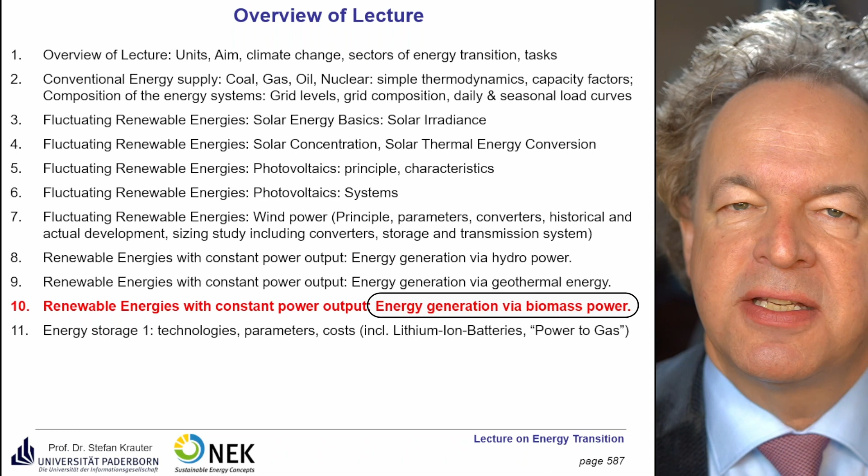Then the following lectures will be about energy storage, meaning how we can make fluctuating renewables like wind and solar more stable. This is quite extensive, so it takes 2 lectures. At the end, I will show you perspective and feasibility of energy transition, comparing opportunities in different countries and regions, especially diesel substitution. We will have a nice example from Princeton University about wind park sizing, optimization, including storage and related transmission systems. We will talk about balancing power via demand-side management, for example, controlled charging of electrical vehicles.

So this is now by Mr. Bain from the year 2004, an introduction to biomass thermochemical conversion. But first, let's take a short look at the video.

Sustainable energy sources are growing in popularity, but we are here to sort the wheat from the chaff, to check out which technologies are going to make the most impact and which are likely to be less useful. I'm Afia Adam. And I'm Ashley House. Hello and welcome to the programme. Today we're taking a look at one of the most basic of energy sources and one which energised the move from caveman to modern man: biomass and bioenergy.

Coming up, we visit the land of the Komodo dragons in Indonesia to see how the nation's biggest palm oil producer is improving sustainability. Waste Not Want Not, a vegetable farm in Kenya that's utilising crop byproducts to produce electricity and fertiliser. Weaning ourselves off coal, we look at the technology allowing power stations to transition to biomass. And finally, we talk to the UK's leading green energy company about plans to produce energy from the stuff under our feet, grass. In the meantime, I travelled to the sunny Italian capital to meet our biomass expert, who's a natural resources officer at the United Nations Food and Agriculture Organization.

According to the International Energy Agency, bioenergy provides 10% of world total primary energy supply, making it the single largest renewable energy source. In 2014, biofuels provided 4% of world road transport fuel and are expected to rise slowly, reaching almost 4.3% in 2020. In 2012, 370 terawatt-hours of bioenergy electricity were produced, equivalent to 1.5% of world electricity generation.

Now, when you think about the palm oil industry, you may recall headlines from the late noughties about how it's environmentally damaging. But the industry is fighting back, responding to the criticism and changing with the time. When you're the world's second biggest palm oil plantation company and you're feeling the pressure to be more sustainable, what do you do? You build a research facility. Or at least that's what Golden Agri Resources has done.

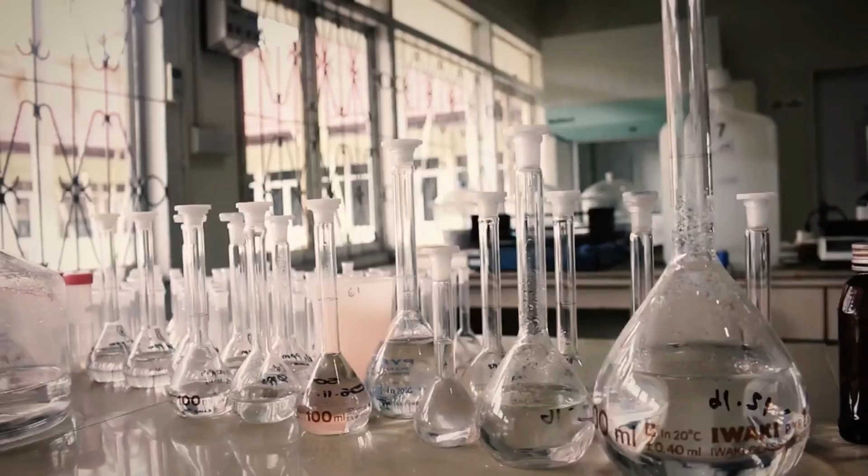The objective of the company is to produce sustainable oil for world demand, whatever the consumer wants to use this oil for, whether it's for food, energy, cosmetics, or any other purpose. But the important thing for us is to produce the oil in a sustainable way, meaning no deforestation, no risk to the environment, and using the best practices.

Palm oil is a vegetable oil derived from the fruit of, unsurprisingly, oil palms. Most commonly, the product is used as a raw material in food production, cosmetics and detergents. But in recent years, it's grown in popularity as a source for first-generation biofuels, such as biodiesel.

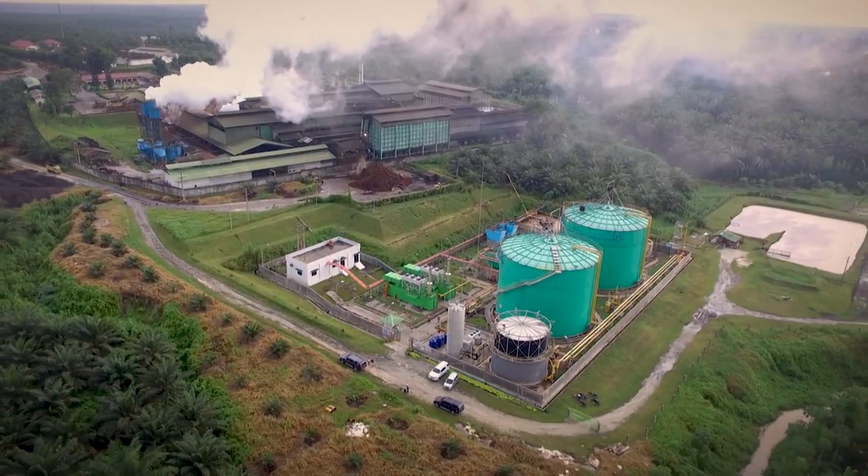That is the waste brought down to biogas by using a bioreactor, which is a completely biological process using mesophilic bacteria to decompose the POME and break down the waste water to generate methane gas. Methane gas being captured, purified and used at our gas engine to generate power.

Biofuels have become an attractive alternative to fossil fuels because they release fewer greenhouse gas emissions. Not only that, when oil palm is planted, it can continue growing for up to 30 years, meaning it has a high carbon capture value.

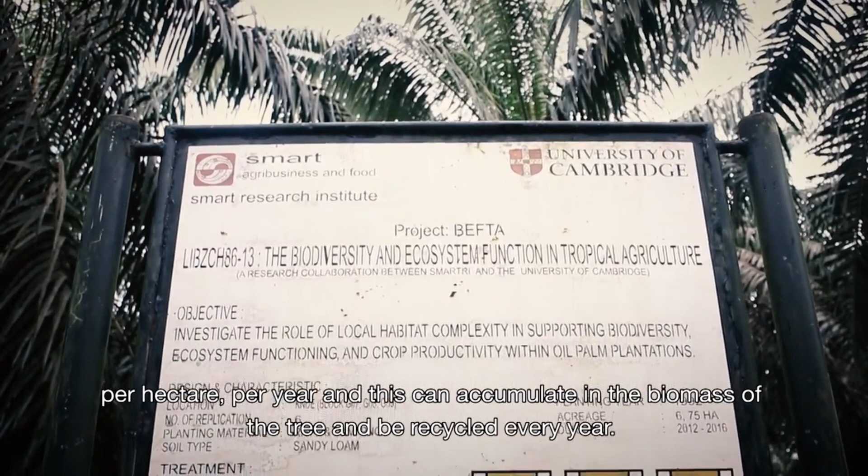What is interesting with palm oil as a plant is that it accumulates carbon in the form of the trunk and in the biomass in the canopy. Every year the palm oil is able to capture about 12 tons of carbon, meaning about 44 tons of carbon dioxide per hectare per year. And this can accumulate in the biomass of the tree and be recycled every year.

When we cut the fronds, we leave them to decompose in the soil, enriching it with organic matter, meaning organic carbon. And when we do the replanting after 25 or 30 years, all this biomass, representing about 100 tons, or about 40 tons of carbon, is also recycled in our soils.

Still, some are critical, saying that with the global population predicted to expand to more than 9 billion by 2050, growing biomass for biofuels is increasingly unrealistic. We need food and we need fuel. There's no getting around that. The solution is in developing them more sustainably.

Andrea Rossi is an expert in sustainable bioenergy and food security. He is the Natural Resources Officer at the Food and Agricultural Organization of the United Nations.

Andrea, thank you so much for having us here on the gorgeous rooftop of the FAO building. Thank you for coming. We can see a lot of green, and that's perfect because today we're talking about biomass.

So Andrea, tell me a little bit about yourself, your work on bioenergy, and what exactly you do here at the FAO. Sure, here at FAO I focus on sustainable bioenergy production and use. In particular, I support developing countries in the design and implementation of sustainable bioenergy policies and strategies that foster both energy security and food security.

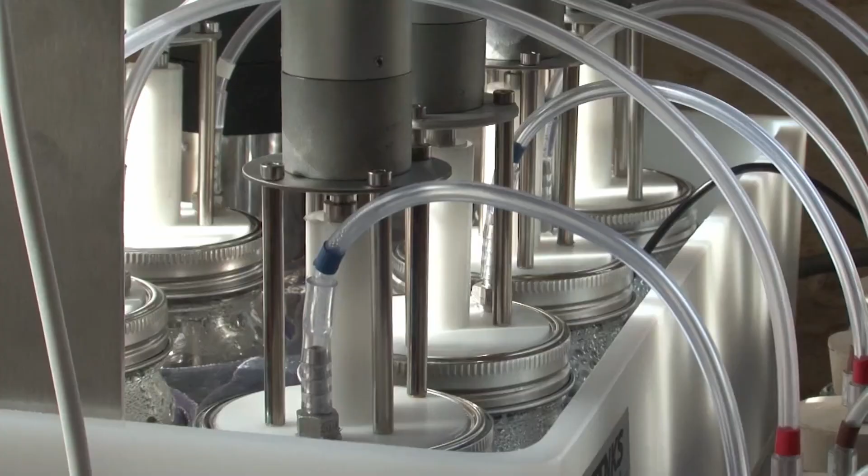It's taken 5 years and many sleepless nights, but finally Oxford-based eco-entrepreneur Mike Mason has achieved his vision, producing biogas from plant waste. Anaerobic digestion is a well-established technology.

Gorge Farm has hundreds of tons a week of waste, and it seemed a shame not to be using it. So I was sitting with some friends over a beer, and they weren't aware of the technology and I wasn't aware of the scale of their waste, and we put two and two together and it became blindingly obvious that it was a good idea.

Mike's farm is close to Lake Naivasha, around 90 kilometres northwest of the Kenyan capital, Nairobi.

On 700 hectares of land, they grow flowers and 20 varieties of vegetables, including baby corn, broccoli and cauliflower, mainly for export to Europe.

As well as feeding people, the crops are now providing the food that fills the belly of this beast, the anaerobic digestion plant. What essentially you are looking at is a big mechanical cow. You feed it biomass on one end, it gives you manure and liquid fertilizer on the other end, and in the process gives you biogas.

Once you've got the biogas, now you've got the fuel required to run the next section of the plant, which is the electricity. Anaerobic digestion is a natural process in which bacteria convert organic materials into biofertilizer and biomethane. It takes around 16 days for the conversion, with biomass working its way through 4 different tanks.

Once we've got the biogas, we need to turn the biogas into electricity. The way we do this is using an engine generator, a gas engine generator. Essentially, this is just like an engine in a car, in a normal vehicle. The only difference is that instead of using petrol or diesel, we use biogas to run it.

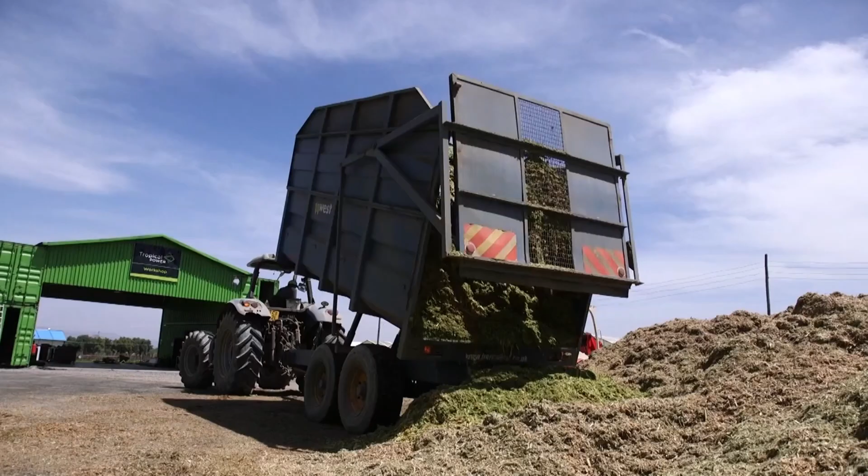At maximum capacity, the biogas plant will require around 120,000 kilograms of biomass residue from the farm every day. This will generate up to 2.2 megawatt hours of electricity. Most of the electricity goes to moving water to where it's required on the farm, and that is pumping.

As for heat, what we've got is greenhouses, and greenhouses need some optimum temperature at which you get optimum production from plants. Sometimes to achieve this, the farm will use diesel boilers to heat the greenhouses. We intend to displace these diesel boilers and basically pipe the heated water to the greenhouses.

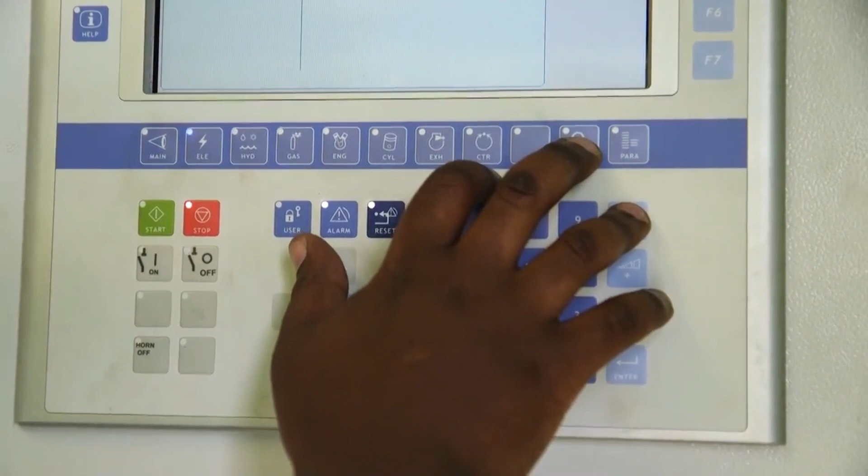Crucially, any excess electricity that isn't required by the farm is fed into the national grid. These sorts of facilities can be replicated, supporting the environment and local economies along the way.

Recent research shows that we could speed up the process of digestion by up to perhaps 30 times. Do that and we change the whole relationship between agricultural waste and energy, and every farmer becomes an energy supplier as well as a food grower.

What are the opportunities for developing countries to develop the use of anaerobic digestion even further so more people can be connected to sustainable energy resources? And of course, what are the limitations with that?

Anaerobic digestion is a mature technology with strong potential, and significant amounts of biogas can be produced through the anaerobic digestion of agro-industrial and livestock residues. This biogas can then be used to generate heat and electricity, part of the heat can be used for the industrial process, and the surplus heat can be supplied to local communities through district heating systems.

This type of technology has a lot of potential, but of course there are also challenges and barriers that need to be overcome. This is again where the importance of a long-term, stable, enabling environment comes into the picture. Some of these limitations include artificially low energy prices due to fossil fuel subsidies, the high upfront investment required for the installation of the technology and its purchase, combined with high cost of capital, and in some cases problems accessing credit faced by investors in developing countries.

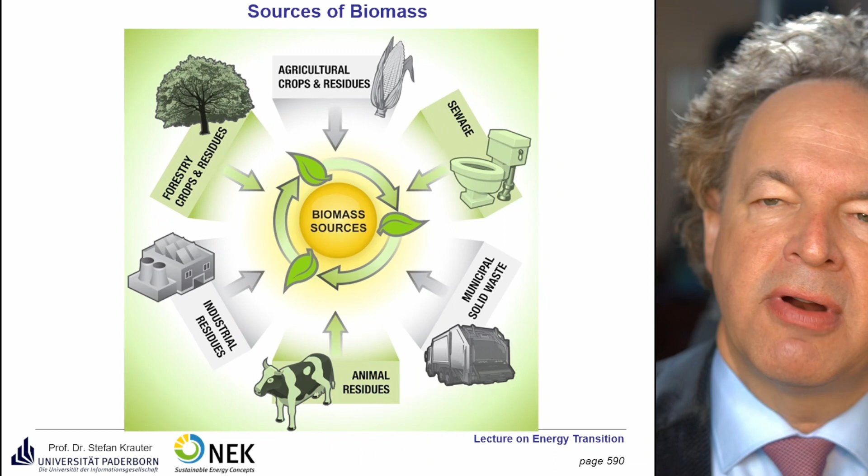Here we see the different sources of biomass. Top left side, the forestry and crop residues, agriculture crops and residues, sewage, municipal waste, animal residues and industrial residues. These are all biomass sources.

For the conversion process in the middle, we have gasification, combustion and co-firing, pyrolysis, and different types of fermentation. As end products on the right side, we have different fuels, for example ethanol or renewable diesel, electricity, heat, but also a lot of chemicals, starting with plastics, solvents, pharmaceuticals, and so on.

Here we have an overview of the biomass products and the conversion processes and the tools for them. First we have hydrolysis, using acids and enzymes. As a product we have sugars and lignin. We have gasification by high heat and low oxygen, called syngas. We have digestion from bacteria, producing biogas. We have pyrolysis.

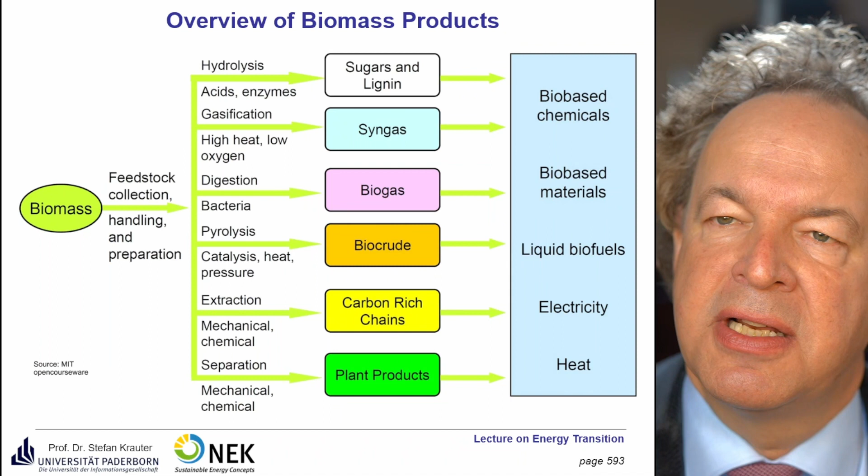Pyrolysis is by heat, pressure, and catalysis, giving us biocrudes. We have extraction, for example mechanical or chemical extraction, giving carbon-rich chains - a lot of possible products. We have separation, mechanical or chemical, giving plant products. These are possible end products: bio-based chemicals, bio-based materials, liquid biofuels, electricity, and heat.

Hey, welcome to our final energy source presentation, and today we're looking at biomass energy. We had mentioned in class before that biomass energy was energy from recently living things, so we're going to take a look at what exactly that includes. You would consider things like wood, but also trash, landfill gas, crops, and alcohol fuels.

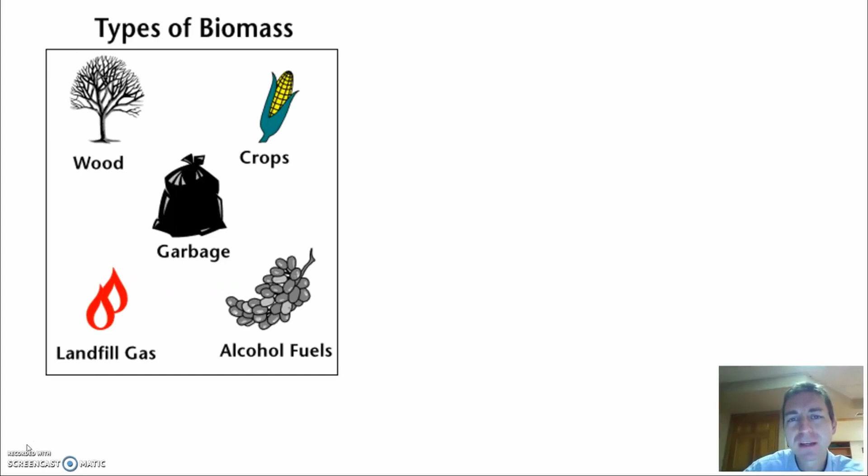All of these things have in common the same sequence of energy transformations, and that is the energy starting at the sun. When the sun comes in as electromagnetic radiation, that energy gets absorbed by plants and is used in photosynthesis to convert radiation energy into chemical energy. So we form sugars, and those sugars are transformed as they go through different processes, and it's still chemical energy at that point.

Ultimately, how do you get that chemical energy to become useful energy? Well, we burn it - you're burning your biomass fuel, and that produces heat or random kinetic energy, which could then be used to run a power plant. When you're burning biomass, it is hydrocarbons that you're burning, and these hydrocarbons release carbon dioxide and water vapor. At this point, you're saying, that sounds an awful lot like fossil fuels.

When we look at the similarities, yes, there is a lot of similarity in terms of where the matter is coming from. It's carbon dioxide that's been pulled out of the atmosphere and fixed into these sugar molecules so that we're getting chemical energy. We have a lot of similarities in terms of the exhaust products you're getting out of them as well. But a major difference is: when was that carbon dioxide in the atmosphere?

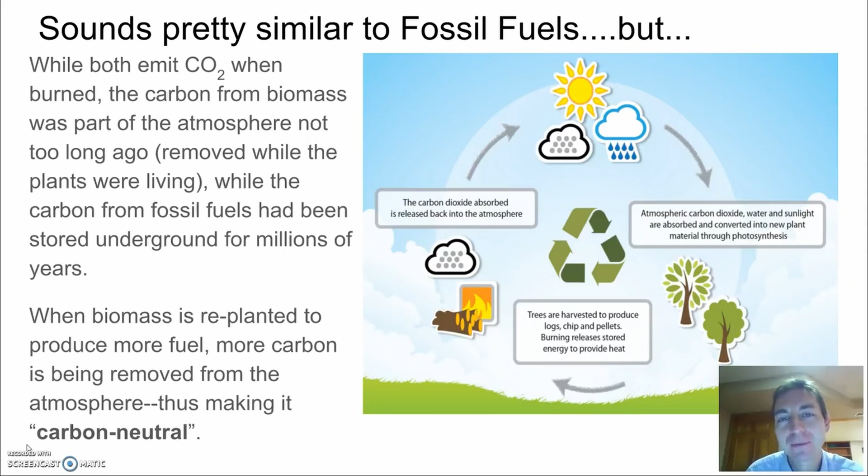So it's a complete cycle, and therefore it's often argued to be carbon neutral. It doesn't add additional carbon dioxide to the atmosphere because even though CO2 is coming off of the burning reaction, it is not actually new, because it's been recently in the atmosphere to begin with. It came from plants that had just recently taken it out of the atmosphere.

Other forms of biomass energy besides burning wood would be things like landfill gas, which we've already talked about, and burning trash, which also falls in this category of biomass fuels. But something we haven't really talked about is a way you may not even be conscious that we use biomass energy all the time. Your car is probably running off of biomass energy a little bit at least. What do I mean?

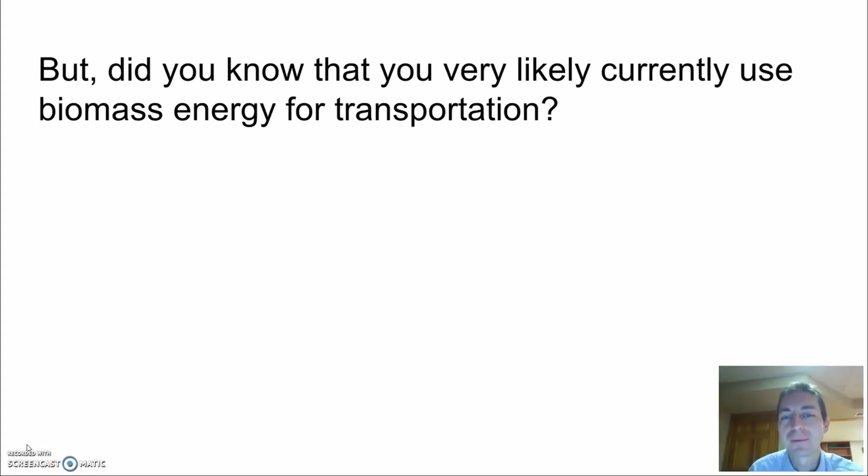I'm talking about this: you go to the gas pump and read the little sticker, and it says this product may contain up to 10% ethanol by volume. Typical unleaded gas here in Connecticut, you're going to find about 10% ethanol, and ethanol is biomass fuel.

So why are we putting it there? Well, there's a couple of things. Number one, it's been shown to reduce certain pollutants that are given off when you are combusting the fuel inside the engine. The byproducts come out a little bit cleaner when you have ethanol blended in, and that's one of the reasons we use it.

Another argument for ethanol use is that it extends the lifespan of how long our fossil fuels will last. Gasoline will last that much longer if we're only using 90% of it instead of 100% of it in our gas tanks. So when we look at how you make ethanol, what's the process, where is it coming from?

We have a typical pattern for how that happens today, and that is corn. There's a lot of corn grown in the United States, and it's not all for food—some of that corn is for making fuel. If you look at crops like corn, you harvest it, and you're actually using the edible part of the corn to make fuel for a car, for example. You'd grind it up, separate it into the different kinds of sugars you have, and distill them.

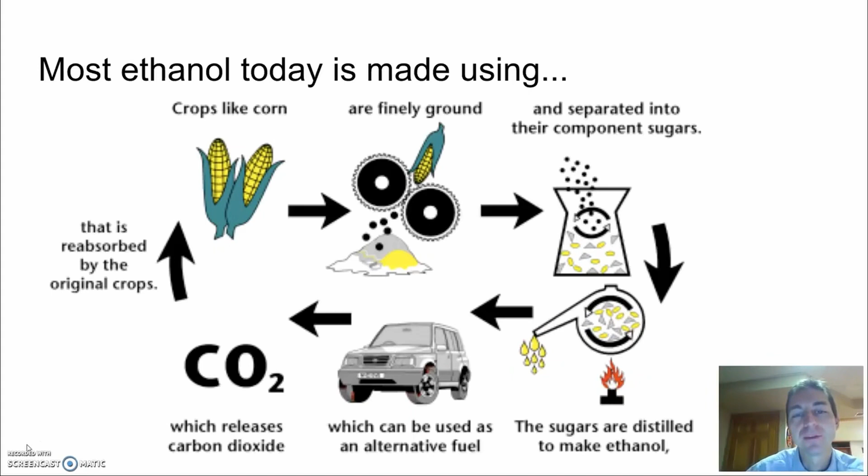Just like making alcohol, you're doing a distillation process, and that's basically what you're producing. This gets blended into gasoline and burns—it's extra fuel in a sense. So it's going to be producing some carbon dioxide, but you'd argue it's neutral because it's getting reabsorbed by the next round of crops you're growing, which are taking that carbon dioxide in.

So some people have thought, wouldn't it be better if we could use the parts of the plant that aren't so useful? One idea is to take the plant matter that's not digestible, but use it in a way where we could still do the same kind of process. This is referred to as cellulosic ethanol. One idea for a crop that we can grow really quickly and that is full of usable material for this process is known as switchgrass.

We could plant this grass that grows rapidly, harvest it, and then do some extra steps. Some initial pre-treatment is necessary, involving shredding it up and adding chemicals to break things down so you can get the regular fermentation reactions to take place. Then you can produce fuel from the waste products, or what are typically considered waste products from a plant.

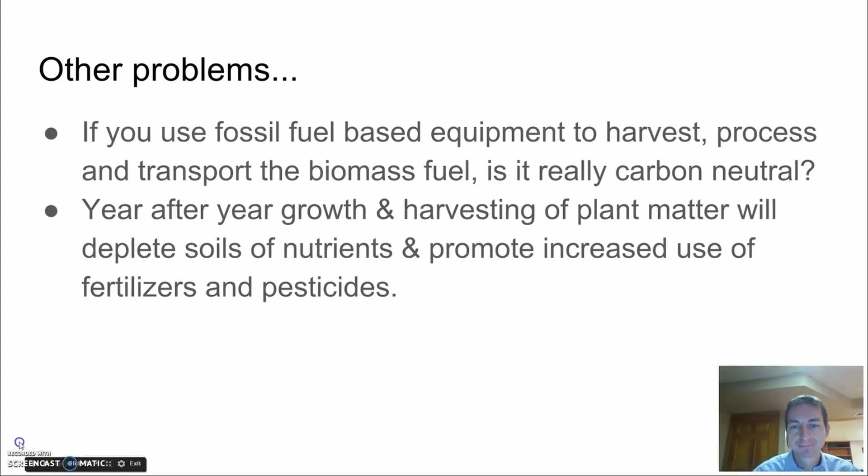Let's see some basic definitions. What is combustion? Combustion is the thermal conversion of organic matter with an oxidant, normally oxygen, to produce primarily carbon dioxide and water. The oxidant is in a stoichiometric excess to allow complete oxidation.

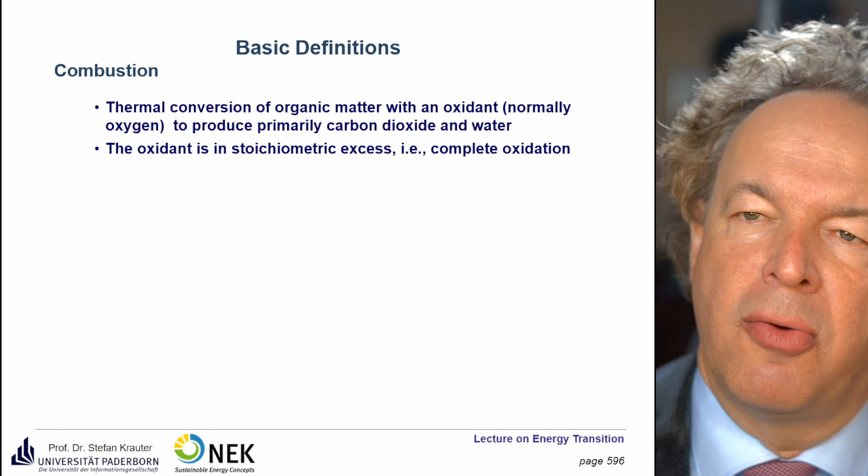And we have pyrolysis. Pyrolysis is the thermal conversion or destruction of organics in the absence of oxygen. In the biomass community, this commonly refers to low temperature thermal processes producing liquids as a primary product, with the possibility of chemical and food byproducts.

Gasification is the thermal conversion of organic matter at elevated temperature and reducing conditions to produce primarily permanent gases, with char, water, and condensables as minor products. The primary categories are partial oxidation and indirect heating.

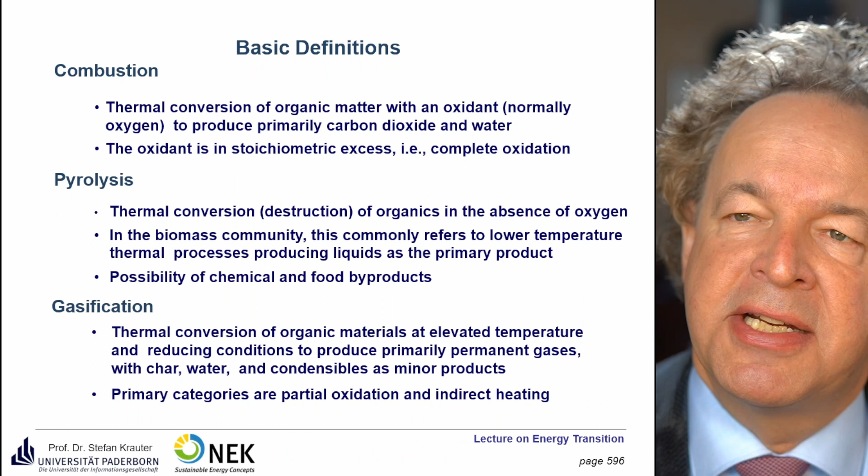This is in the vicinity of 16 to 17 megaBTU. This is a British thermal unit. So 1 kilojoule is about 1.055 BTU, one British thermal unit.

Then we also have the unit SCF, meaning standard cubic foot. The conversion is for 1 cubic meter, it's about 35.3 cubic feet. The MAF here means moisture and ash free, because otherwise you would lose some energy converting that moisture into steam.

Then we have syngas. Major components are carbon monoxide, hydrogen, and carbon dioxide. The carbon monoxide to hydrogen ratio is in the typical range of 0.5 to 2. The high heating value is 450 to 500 BTU per standard cubic foot.

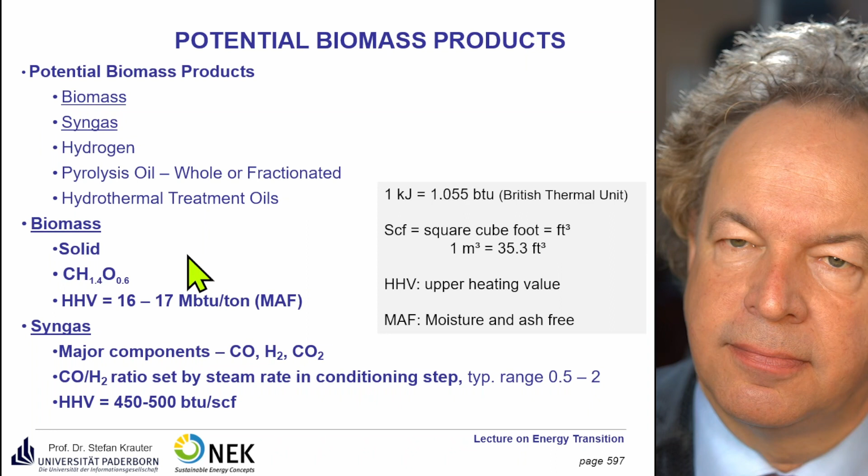We have pyrolysis oil, mentioned before already. Its chemical composition: water 20 to 30%, lignin fragments 15 to 30%, aldehydes 10 to 20%, carboxylic acids 10 to 15%, carbohydrates 5 to 10%, phenols 2 to 5%, furfurals 2 to 5%, ketones 1 to 5%.

Then we have hydrothermal treatment oils, so it's water plus alkali at a temperature of 300 to 350 degrees Celsius. The pressure is high enough to keep the water liquid, and the use of carbon monoxide is also an option here. Yield is above 95%.

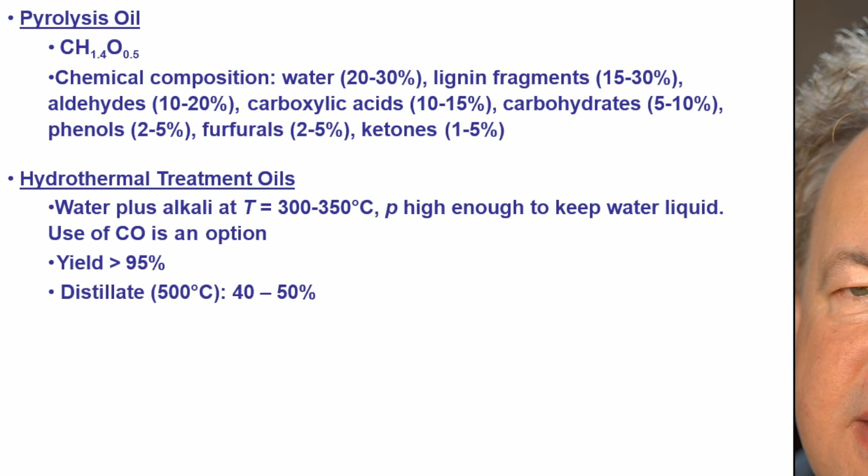Qualitatively, we have long aliphatic chains, some cyclic components containing carbonyl groups, a few hydroxyl groups, ether linkages, and carboxylic acid groups. The heating value is between 28 and 34 megaBTU per ton.

Let's start with combustion. The stages of combustion of solids: first we have drying, to take out the moisture. Then we have devolatilization via pyrolysis or via gasification. Then we have flaming combustion. Then we have residual char combustion at the very end.

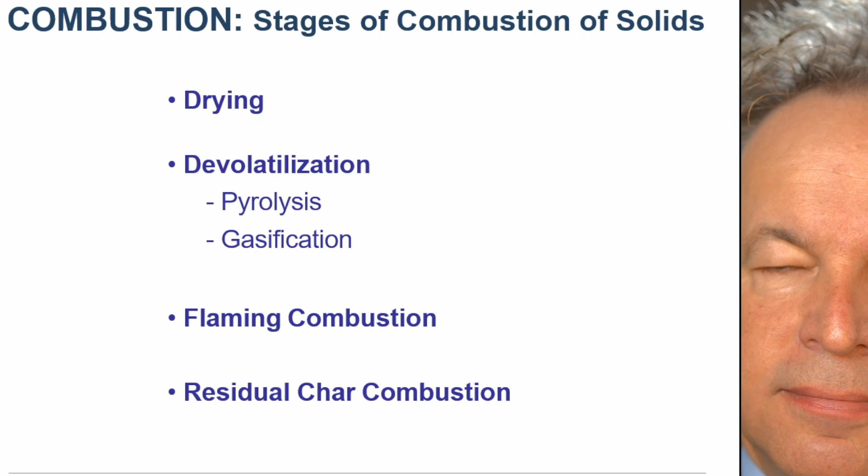The typical combustion reactions are: we have a carbon atom, solid form, which oxidizes via an oxygen molecule, gas form, to form carbon dioxide, which is also a gas.

Or we can form hydrogen in gaseous form with oxygen also in gaseous form to make water. We use double the amount of hydrogen than oxygen to get H2O liquid. Then we have CH4, that's methane, also gaseous, plus two oxygen molecules, giving as products carbon dioxide, gas, and water, liquid.

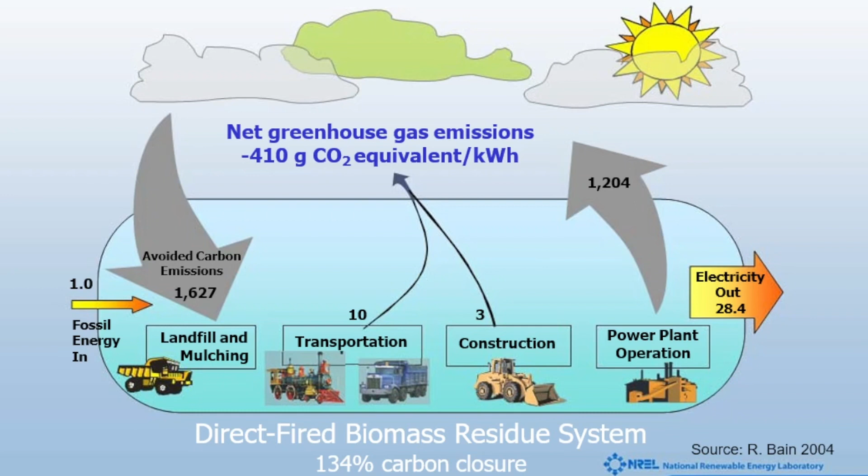That's changing now, this data is from 2004, but biomass electricity production didn't make as much progress as wind and solar power.

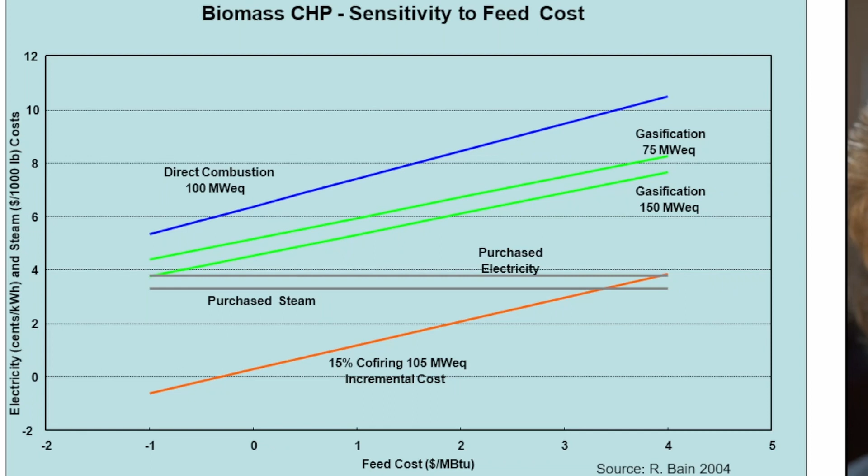Here you have the sensitivity to feed costs. On the x-axis are the feed costs, and on the y-axis the electricity costs. It's apparently linear: if you double the feed costs, or have high feed costs, then you also have high electricity costs.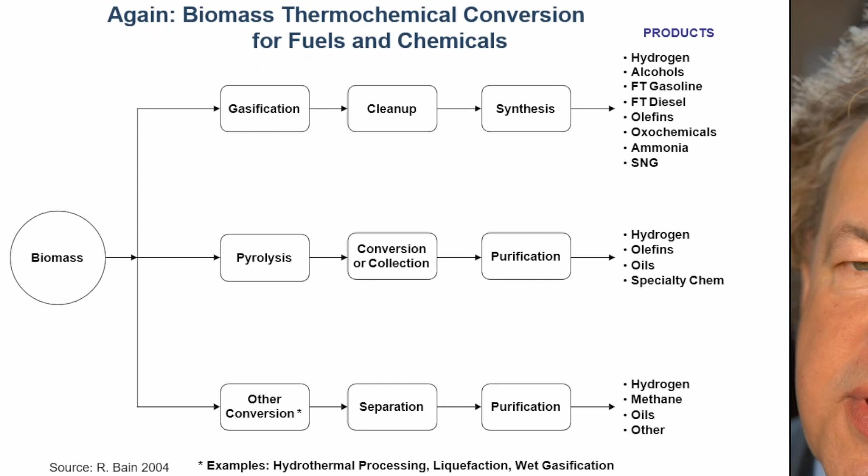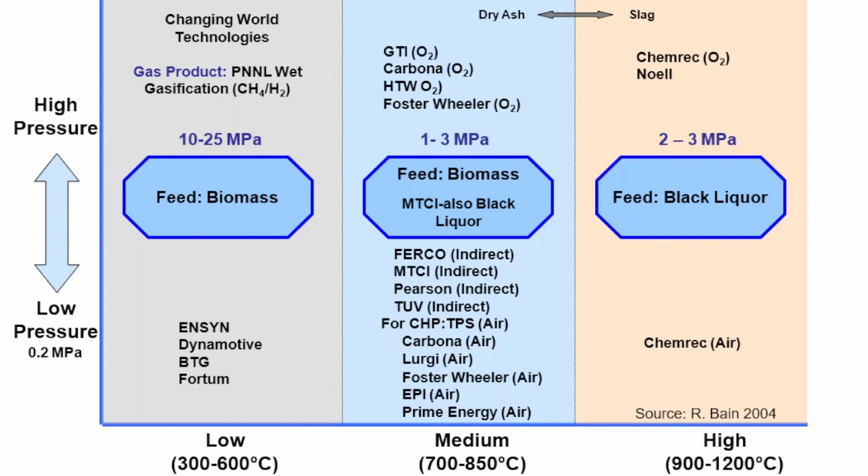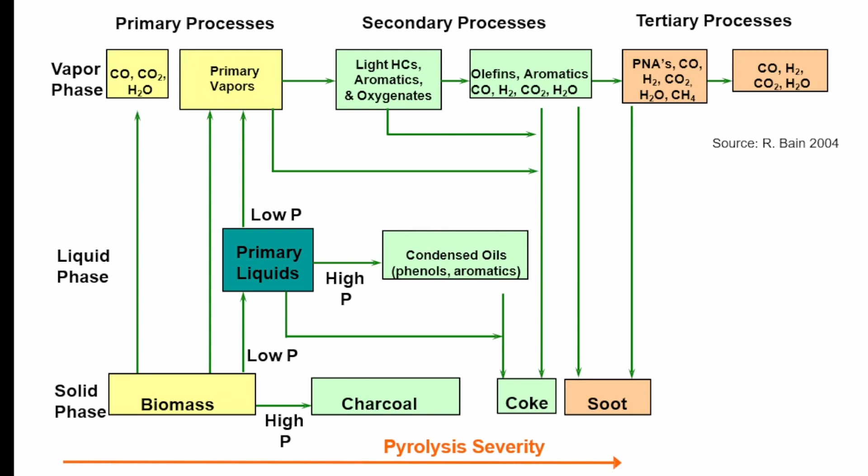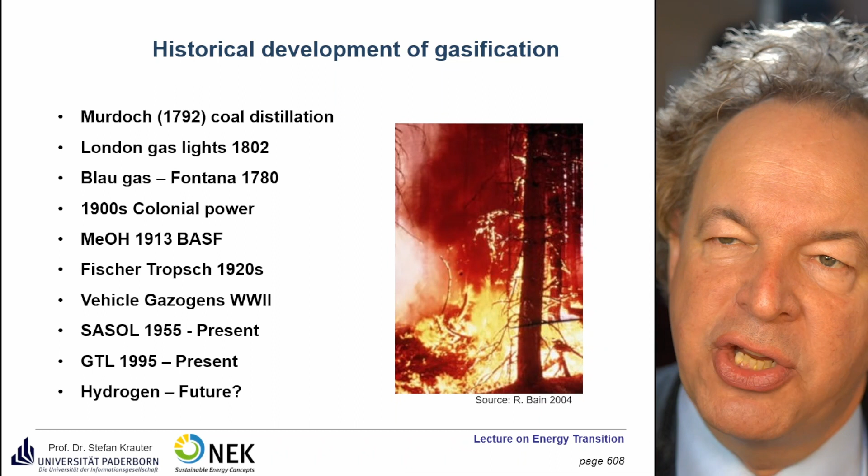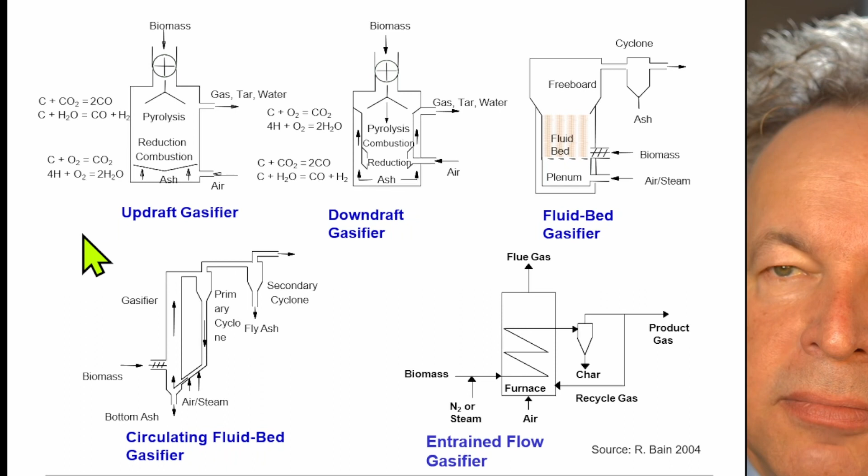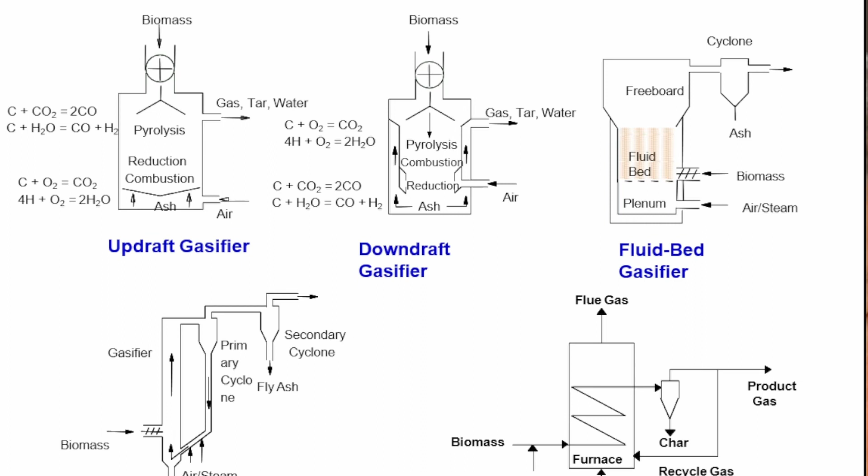Next, we have the downdraft gasifier. Again, the biomass comes from the top, the air comes from the lower part, and then the gas comes out from a lower part and goes up. The advantages are it allows small scale applications, low tar. The disadvantages are feed size limits, scale limitations, producer gas, and it's moisture sensitive.

We have the fluid bed gasifier. So we have a fluid bed. The biomass comes from the lower part and also the air from the lower part. And we have a cyclone to remove the ash. The most important part is the fluid bed here. This has the advantage that we can use a large-scale application. We have good feed characteristics, direct and indirect heating. It can produce syngas. The tar removal is only medium, and we have a high particle loading.

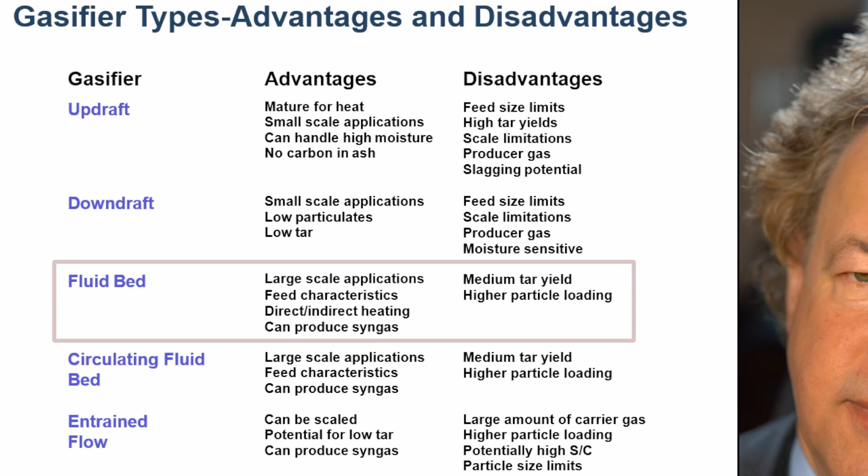Then we have the circulating fluid bed. It's here, so the bed is circulating. This has the advantage that we also have large-scale application. They have good feed characteristics and can produce also a syngas. Same disadvantages: medium tar yield, and we have a high particle loading.

And we have the entrained flow. So we have here the biomass, air and furnace, and then we have the char removal. We recycle some gas for the furnace. It can be scaled. Advantages also, you have low tar. The disadvantage is a large amount of carrier gas is needed, and high particle loading.

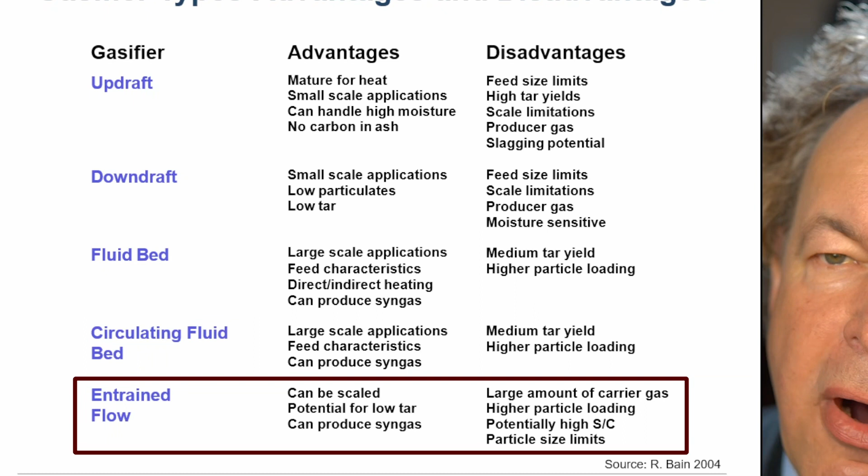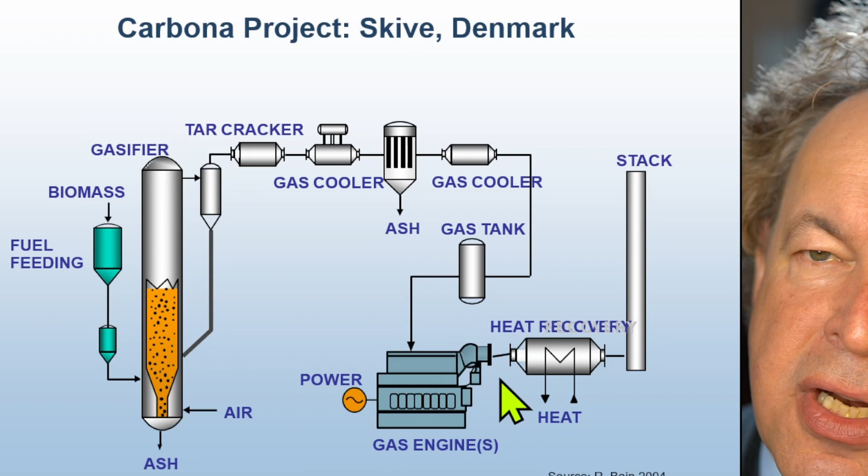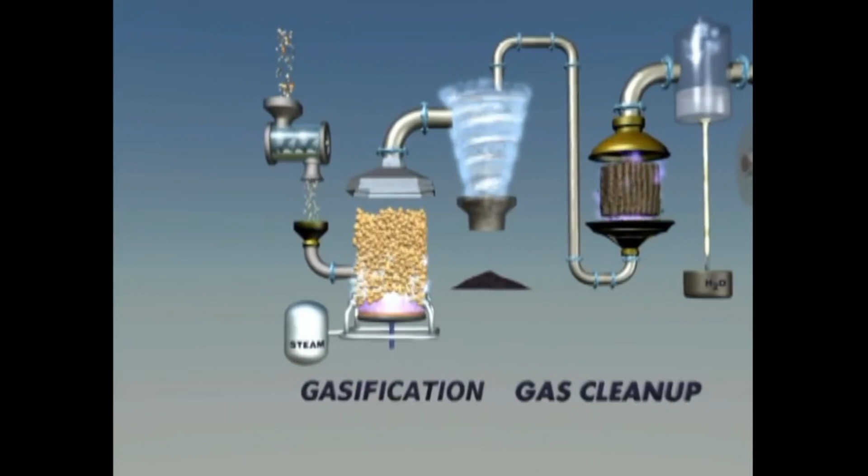The thermochemical conversion process uses heat to break down biomass into intermediates, such as gas or bio-oil, that can be upgraded into fuel and other products. One type of thermochemical conversion process is gasification, a method that uses heat to turn biomass into a hydrogen and carbon monoxide-rich gas called synthesis gas, or syngas. This in turn is converted into liquid transportation fuels or other products. Gasification occurs at relatively high temperatures.

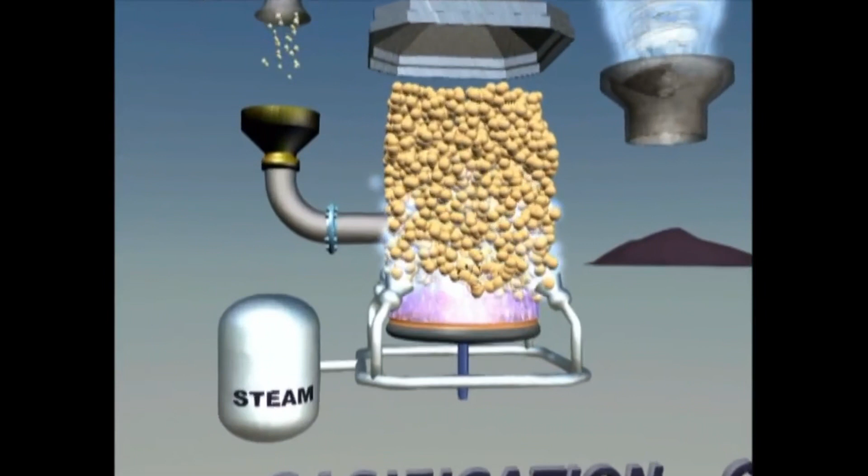Here's one example of a gasification conversion process. Wood material such as forest residue is a common feedstock for the gasification process. For best results, feedstock wood chips are no more than 2 inches in size and have 20% to 30% moisture content by weight, depending on the gasifier. In the gasifier, the biomass is broken down into vapors in a carefully controlled environment that typically contains oxygen and/or steam. The syngas produced is made up of carbon monoxide and hydrogen.

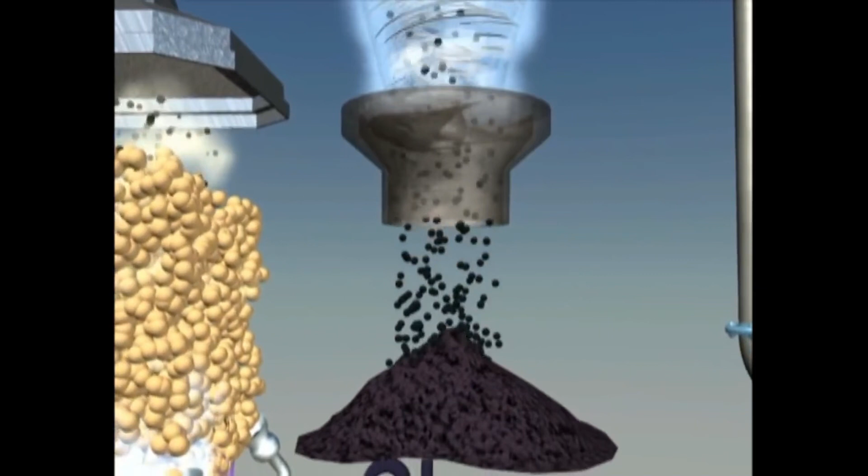Char, a solid byproduct of gasification, is typically removed using a cyclone. Cyclonic separation allows removal of particulates from a gas stream without a filter by using rotational effects in combination with gravity to collect the particles. Tars and methane are also produced. Their quantity and composition depend on the gasification environment. Tars are high molecular weight organic compounds. If they are not removed, these tars will contaminate downstream equipment and inhibit fuel synthesis.

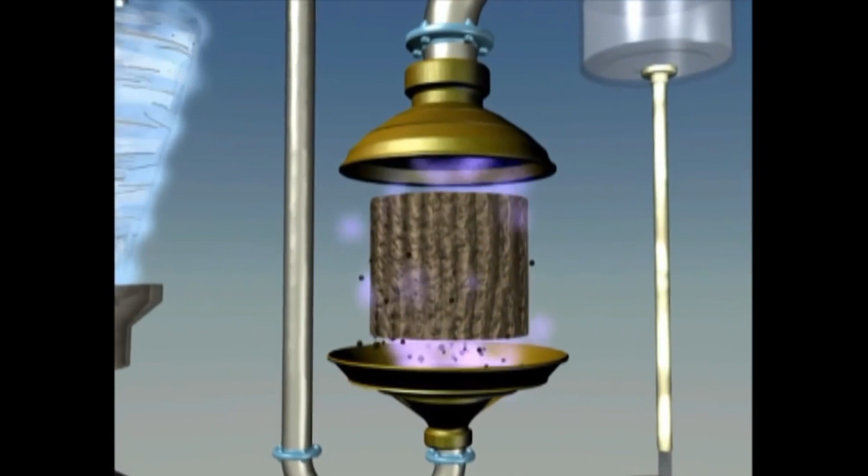One way to remove methane and tars is by using special catalysts to convert the compounds into additional syngas, thus eliminating the methane and tar problem while also improving the efficiency of the process. Additional cleaning and conditioning steps may be required to remove other contaminants such as ammonia, sulfur, and carbon dioxide.

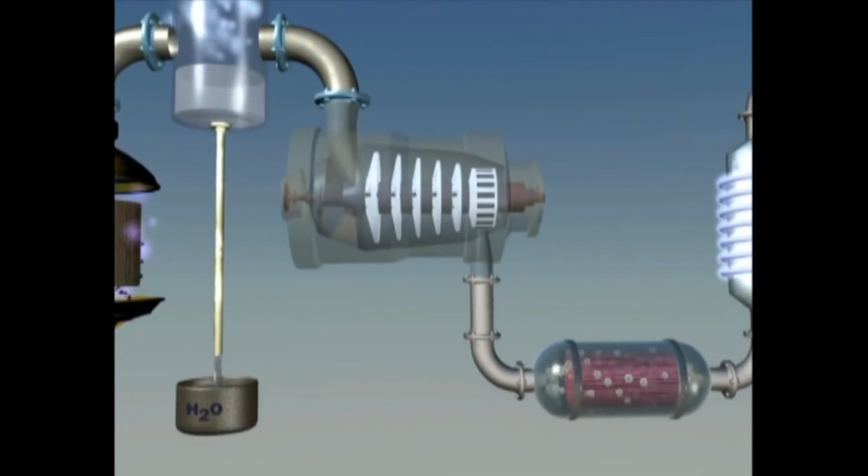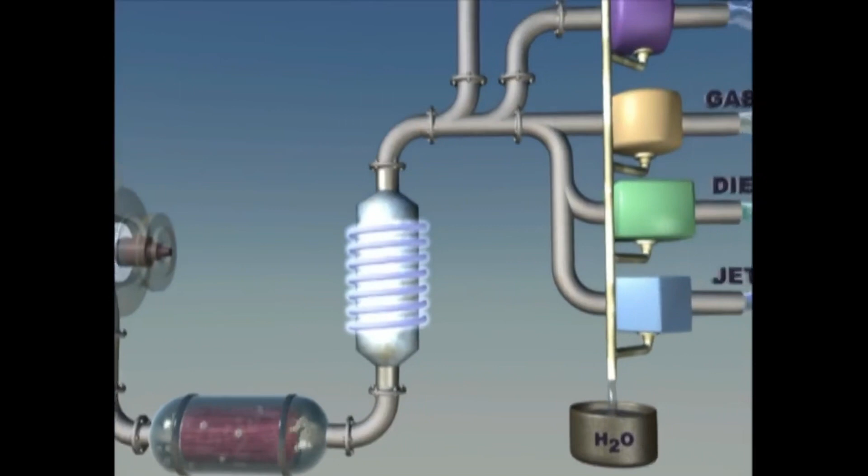The syngas is then conditioned to produce the desired ratio of carbon monoxide and hydrogen to achieve optimal chemical reactions in subsequent steps. The pressurized hot syngas is then passed over a catalyst to form a liquid. The catalyst is contained in a reactor, and the syngas is passed through the reactor, where the carbon monoxide and hydrogen molecules combine to form larger molecules. These molecules are subsequently cooled, condensed, and refined into clean, renewable transportation fuels and other products.

The Department of Energy has supported development of innovative technologies that result in higher yields and superior quality of biomass syngas. These efforts have also resulted in a much more thorough understanding of the gasification process. Enabled by these advancements, industry is deploying gasification technologies that will bring clean, renewable transportation fuels and other biomass-based products to the marketplace.

Here you see the contribution to hydrogen price. So we have a low pressure indirectly heated gasifier system. It's designed for 2,000 tons a day, and we have costs of $30 per ton of dry feedstock. This is the main cost driver, 41%. They have some costs for feed handling and drying. We have costs for gasification. We have costs for the compressor. We have costs for reforming, heat exchange, and so on. And the steam has a negative price because we can sell that steam.

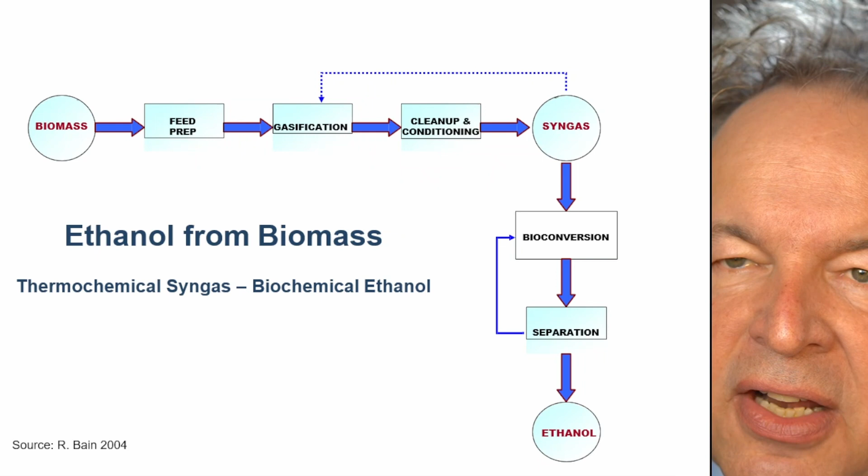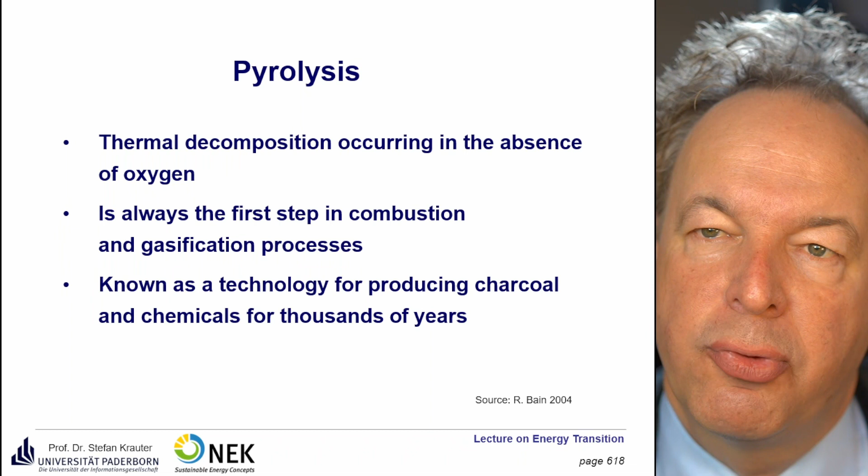We come to pyrolysis. So what is pyrolysis? Pyrolysis is a thermal decomposition occurring in the absence of oxygen. It's always the first step in combustion and gasification processes. It's known as a technology for producing charcoal and chemicals for thousands of years. Let's see a short movie about this.

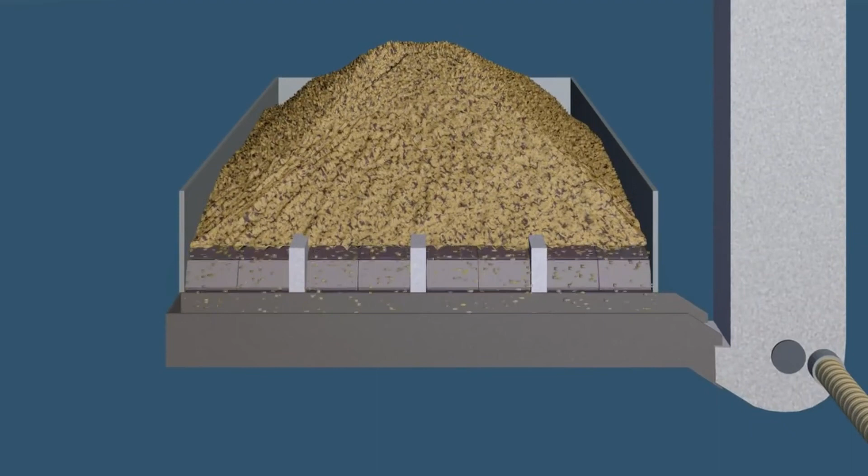A visualization of the biomass pyrolysis process. Biomass storage and drying: wooden or agricultural biomass stored in a dedicated storage facility is transported to the pyrolysis reactor via a screw feeder. The raw biomass is pre-dried inside the feeder through the use of hot and dry air flowing in the crossflow. Biomass pre-drying has a positive impact on the reduction of the moisture content inside the process material by a few percent, and additionally increases the pace of the processes occurring in the following stages.

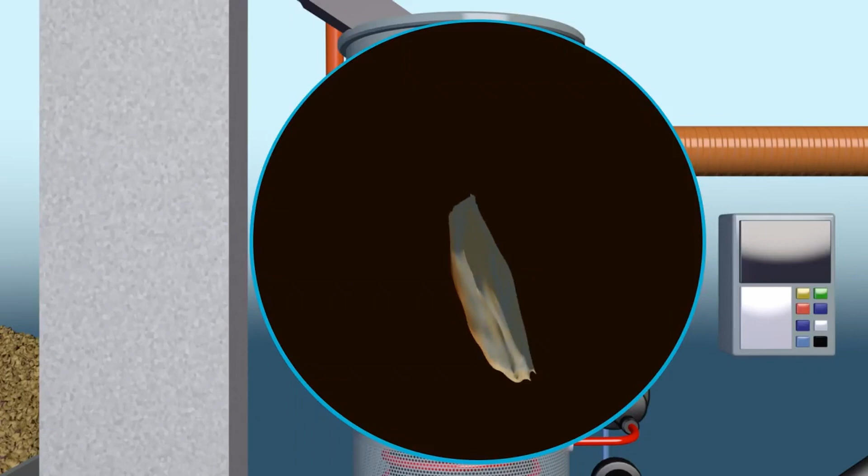Biochar production: pre-dried and preheated biomass then goes to the pyrolysis reactor, where four processes take place. The moisture evaporation process: all the moisture accumulated in the raw biomass has to evaporate in order to initiate the carbonization process. Depending on the type of biomass and the amount of moisture accumulated in the process material, it can take from several to more than a dozen seconds, and its efficiency is due to the high temperature in the upper part of the reactor.

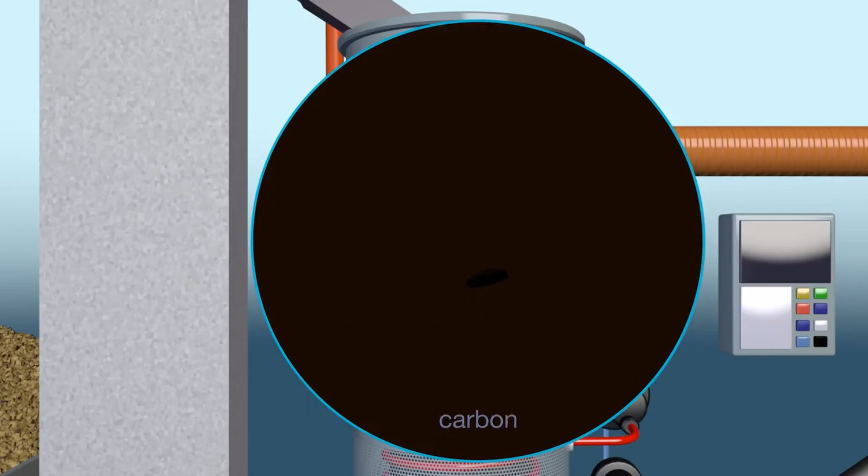The carbonization process: dried and degasified biomass is treated with high temperature. This process results in the quick concentration of elemental carbon and the disappearance of the fibrous structure, improving its grindability. Depending on temperatures inside the reactor and the duration of the carbonization process, the ready material can have a calorific value in the range of 21 to 29 megajoules per kilogram.

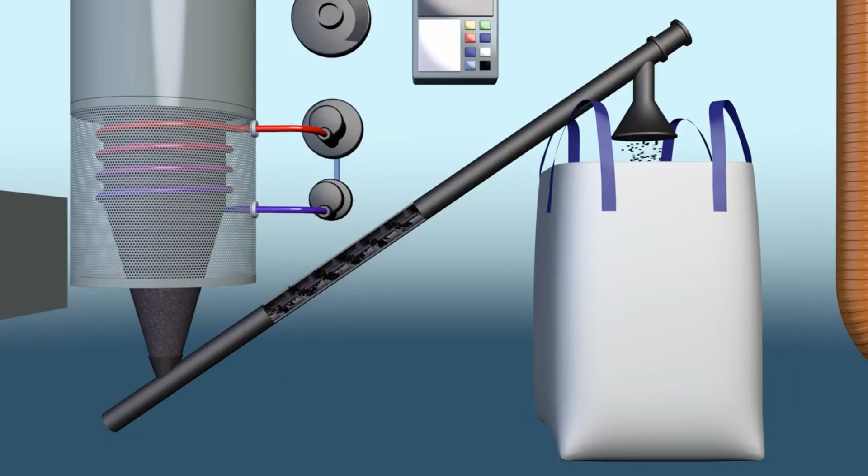The cooling process: the ready material is cooled to ambient temperature with the use of a cross-flow water cooler. In the next stage, carbonized biomass is loaded to big bags, pelletized, or transferred directly to the boiler.

Heat generation: the flammable gas has a relatively low calorific value, so the best way to make use of it is by conversion to hot water. Pyrolysis systems with productivity from 300 to 1,000 kilograms per hour can supply district heating networks with a maximum capacity from 1 to 3 megawatts respectively.

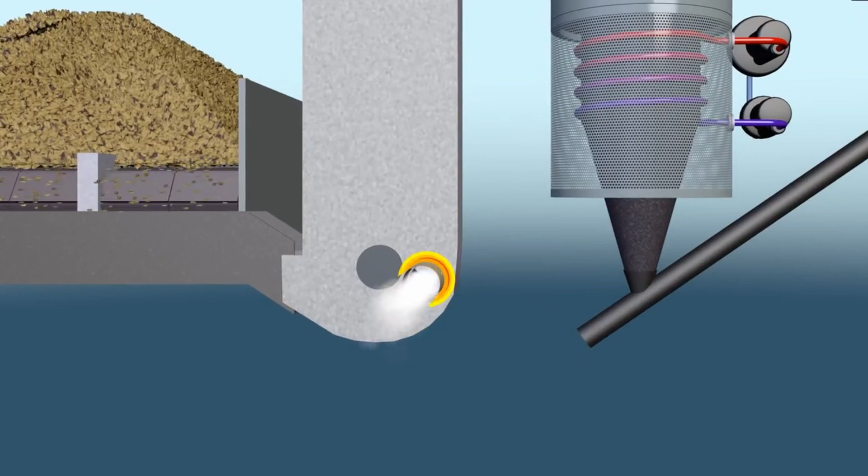The yield of flammable gases depends on the type and quality of the processed biomass and the expected characteristics of the carbonized biomass. In order to maximize the efficiency of the pyrolysis process, hot air taken from the coat of the reactor is used in the biomass pre-drying process. Hot air is transferred to the bucket feeder, which was illustrated some time ago. At the end of the process, all gases are mixed and emitted through the common stack.

From the products of biomass pyrolysis, if we use fast pyrolysis, we have 75% liquid products at moderate temperature and short residence time, 12% char products, and 13% gaseous products. If we use carbonization, we have only 30% liquid products at low temperatures and long residence time, and as the name suggests, a lot of solid char products at 35% and 35% gaseous products.

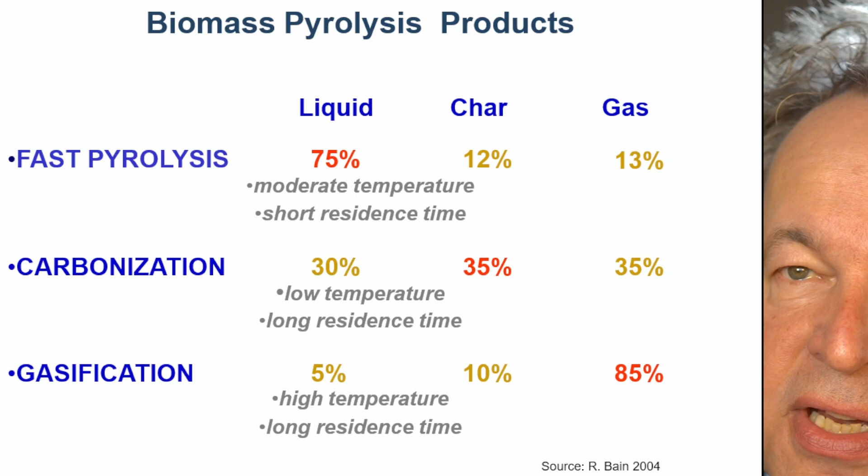Then we have gasification. It occurs at high temperature and also long residence time. We have 5% liquid products, 10% solid char products, and 85% gaseous products.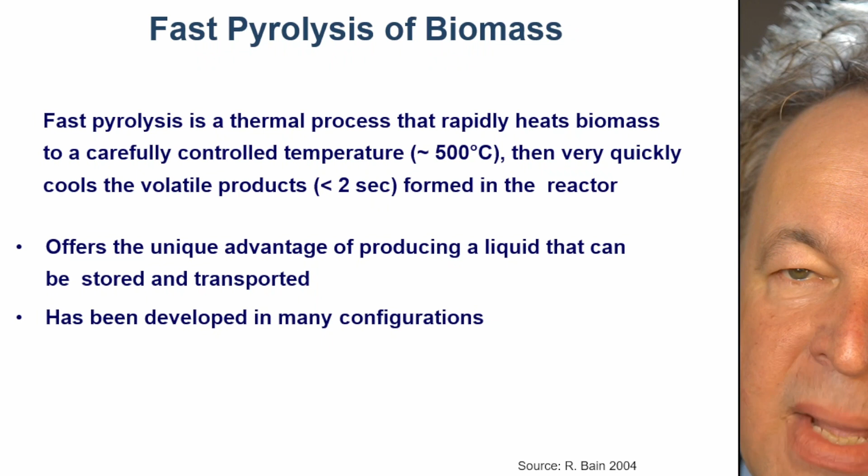Let's take a look at the fast pyrolysis process. Fast pyrolysis is a thermal process that rapidly heats biomass to a carefully controlled temperature in the vicinity of 500 degrees Celsius, then very quickly cools the volatile products within 2 seconds or less, which have been formed in the reactor. It offers a unique advantage for producing a liquid that can be stored and transported. It has been developed in many configurations, but at present it's still at a relatively early stage of development.

Some typical operational pyrolysis units from different companies: from Dynamotive about 400 kg per hour, or 20 kg per hour by RTI. There are many research units. For circulating fluid beds, we have examples between 1000 kg per hour and 20 kg per hour. The rotating cone, some examples in the Netherlands with 200 kg per hour. Vacuum, 3500 kg per hour at Pyrovac. And Auger pyrolysis at 200 kg per hour at ROI.

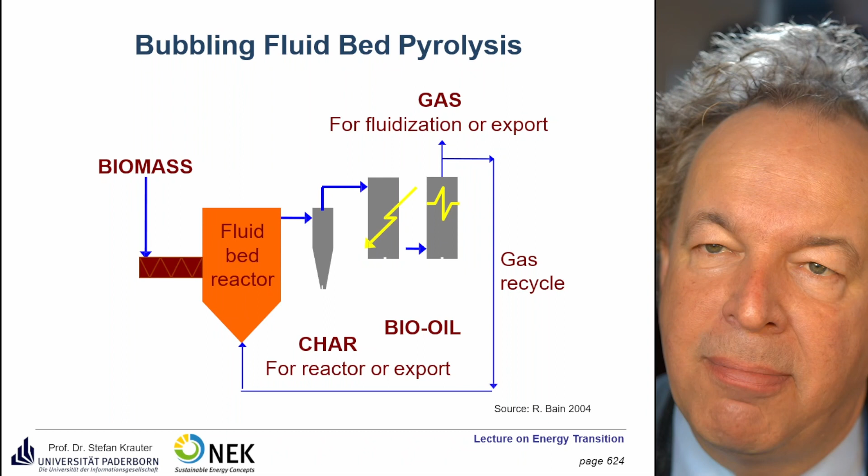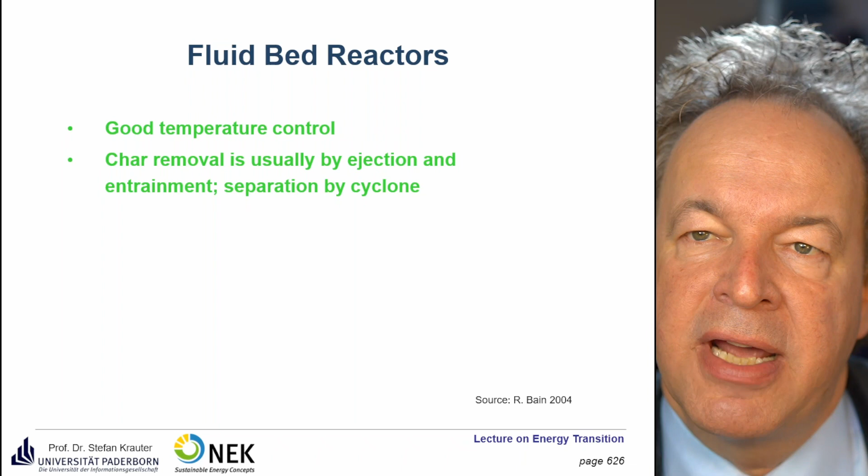The advantages of fluid bed reactors are good temperature control. Char removal is usually by ejection and entrainment, separation by cyclone. It's easy to scale, a well understood technology since the first experiments at the University of Waterloo in the 1980s. The disadvantages are that small particle sizes are needed, and heat transfer to the bed at large-scale units still has to be proven.

Now the circulating fluid beds, CFB. We have a circulating fluid bed, and you see here the hot sand which is used there. We have some flue gas, and again the gas production as a byproduct, the bio-oil.

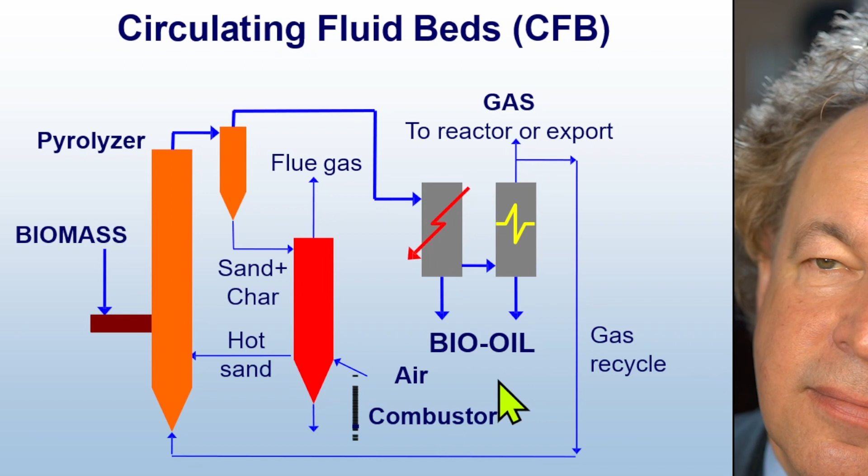The advantages: also good temperature control in the reactor, large particle sizes are possible, suitable for very large throughputs, and it's a well understood technology. Disadvantages are the hydrodynamics are more complex and we have larger gas flows in the system. The char is finer due to more attrition at higher velocities, so we have to separate it by cyclone. Closely integrated char combustion requires careful control, and heat transfer to the bed at large-scale systems still has to be proven.

Here you see a rotating cone, BTG. Centrifugation drives hot sand and biomass up a rotating heated cone, shown here in red. The vapors are condensed, the char is burned, and the hot sand is recirculated. You see how the particles are lifted up here.

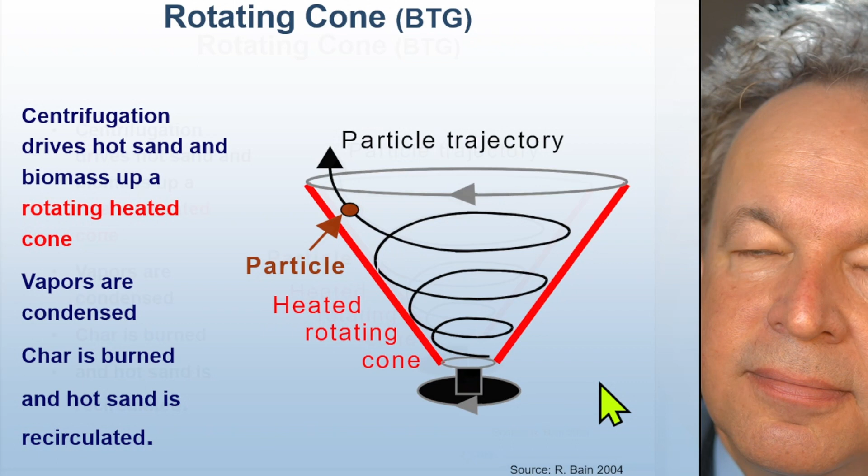Vacuum moving bed was developed in Canada, scaled up by the company Pyrovac. We have pilot plants operating at up to 50 kilograms per hour, and demonstration units at 3.5 tons per hour. It's analogous to fast pyrolysis, as vapor residence time is similar. We have a lower bio-oil yield in the vicinity of 35 to 50%. It's quite complicated mechanically, stirring the wood bed to improve heat transfer.

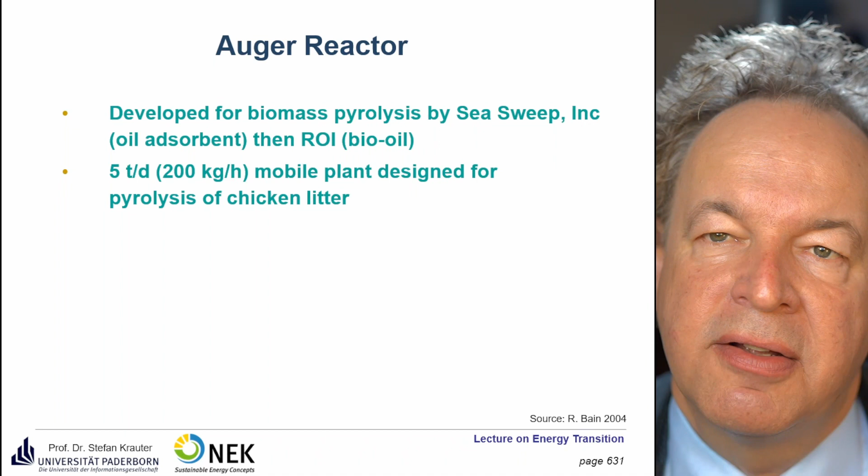The Auger reactor was developed for biomass pyrolysis by the company Sea Sweep, then by ROI. It allows for 5 tons per day, or 200 kilograms per hour. It's a mobile plant, designed to be moved to chicken farms to make pyrolysis of chicken litter on site. It's compact and does not require a carrier gas, with a relatively low process temperature at 400 degrees Celsius. We have lower yields in bio-oils, moving parts in the hot zone, and still a problem with heat transfer at large scale.

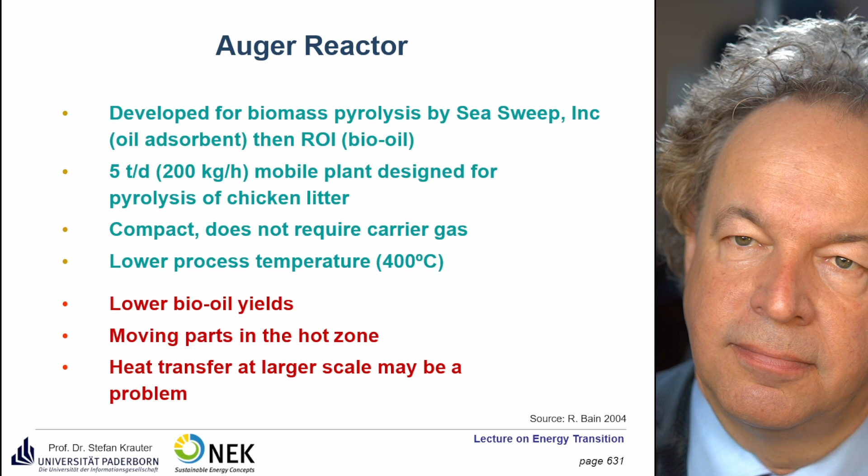Char removal: char acts as a vapor cracking catalyst, so rapid and effective removal is essential. Cyclones are the usual method for char removal, but fines pass through and collect in the liquid product. Hot vapor filtration gives a high quality product free of char. Char accumulation cracks vapors and reduces liquid yields by about 20%. Limited experience is available for this.

Liquid filtration is very difficult due to the nature of char and pyrolytic lignin. Liquid collection: primary pyrolysis products are vapors and aerosols from decomposition of cellulose, hemicellulose and lignin. Liquid collection requires cooling and agglomeration of coalescents and aerosols. Simple heat exchange can cause preferential deposition of heavier fractions, leading to blockage. Quenching in product liquid and immiscible hydrocarbon, followed by electrostatic precipitation, is the preferred method.

Bio-oil is water miscible and comprised of many oxygenated organic chemicals. Its properties are as follows: it's a dark, mobile liquid. It's combustible and non-miscible with hydrocarbons. The heating value is about 17 megajoules per kilogram. Its density is 1.2 kilograms per liter. It's acidic, with a pH value of 2.5. It has an odor, and it ages, meaning that viscosity increases with time.

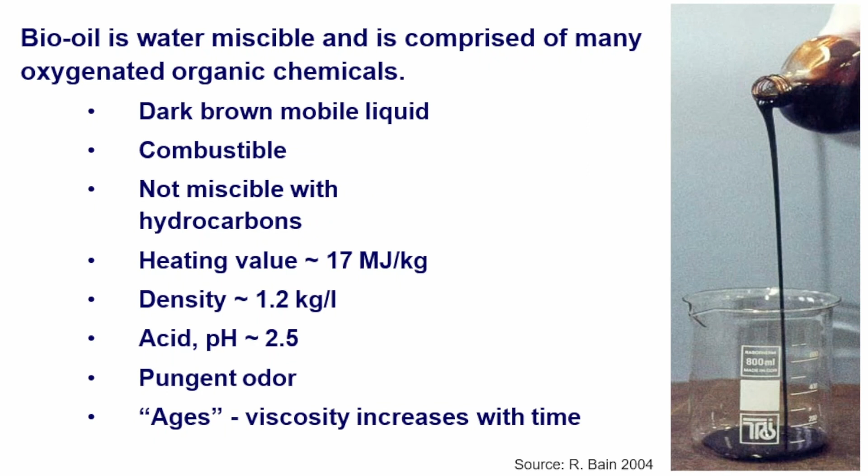Upgrading of bio-oils: there are physical methods, such as filtration for char removal, emulsification with hydrocarbons, and solvent addition. There are also chemical methods, such as reaction with alcohols, catalytic deoxygenation, hydrotreating, and catalytic or zeolite vapor cracking.

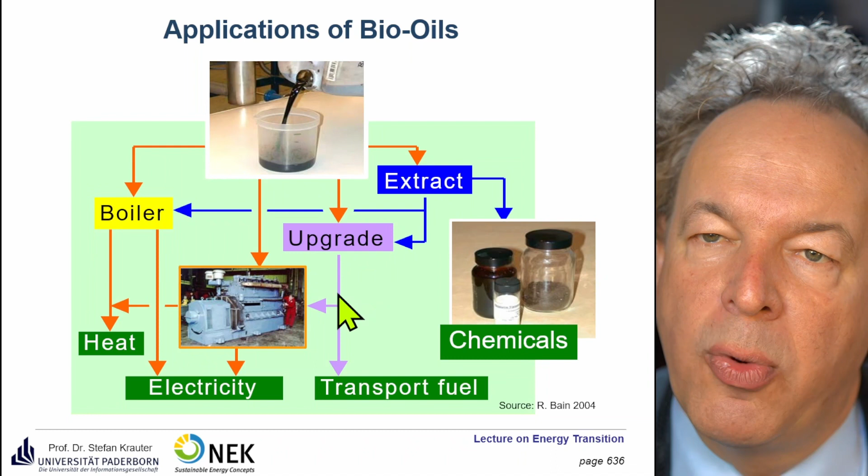Here are some applications of bio-oils. We have the extraction process, which can then be used directly for chemicals, or we have an upgrade process. Then it can be used in a generator to produce electricity, or we can use it as a fuel for driving vehicles. We can also use the extract for heat, and generate electricity by a steam engine or similar.

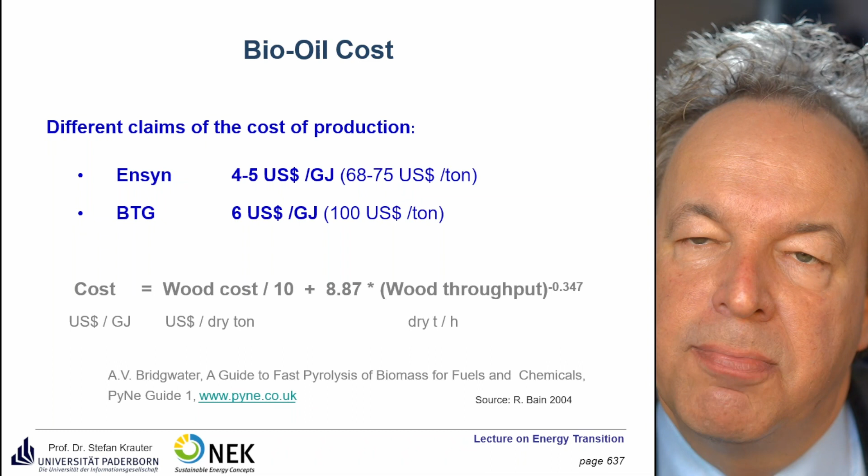Bio-oil costs, from these two companies: they say it's $4 to $5 per gigajoule of heat, with base costs of $68 to $75 per ton. BTG says it's $6 per gigajoule of thermal energy, with costs in the vicinity of $100 per ton. As a rough estimation, by this formula: the cost in US dollars per gigajoule equals the wood cost in US dollars per dry ton, divided by 10, plus 8.87 times the wood throughput in dry tons per hour to the power of minus 0.347.

Why is bio-oil not used more? The costs are 10 to 100% more costly than fossil fuel. The availability is limited in supply. The lack of standards and inconsistent quality inhibits wider usage. There's also incompatibility with conventional fuels, unfamiliarity for users, the need for dedicated fuel handling, and a poor public image.

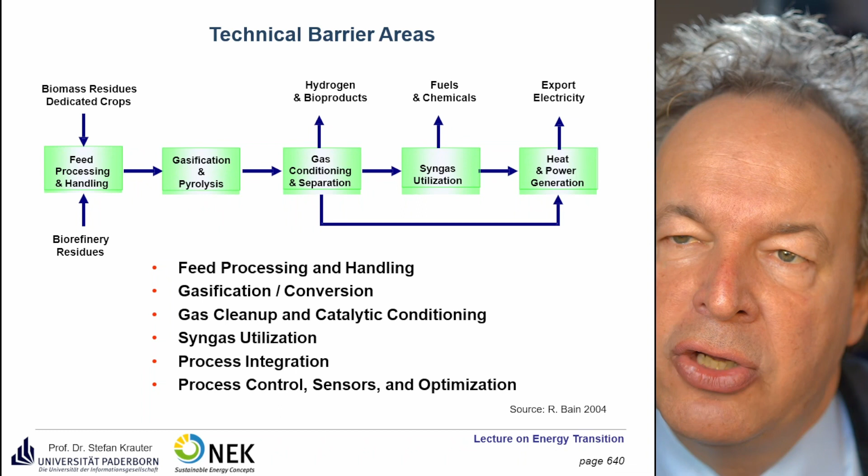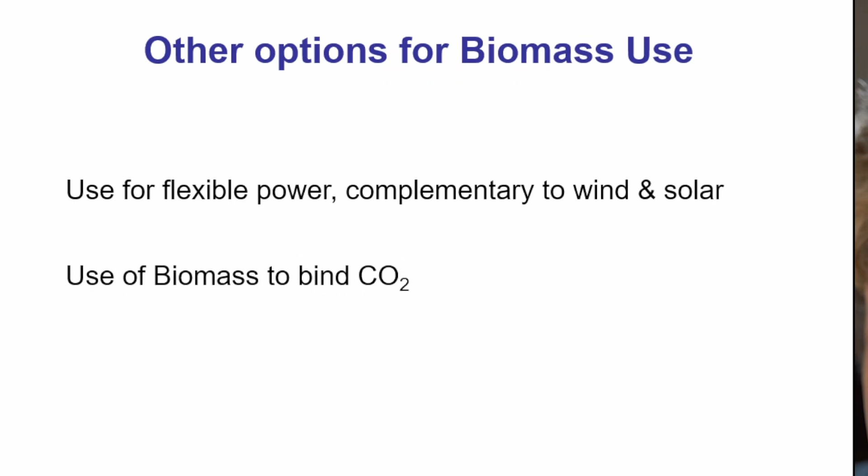Further on, there are other options for biomass use. The advantage is that it's quite controllable, so we can provide flexible power in complementarity with wind and solar power. You can also use biomass to bind carbon dioxide, or use growing biomass in trees and grass to cool by evaporation. For example, in big cities this is quite noticeable: if you have a lot of trees, the temperature is significantly reduced, and by that you save energy for air conditioners and so on.